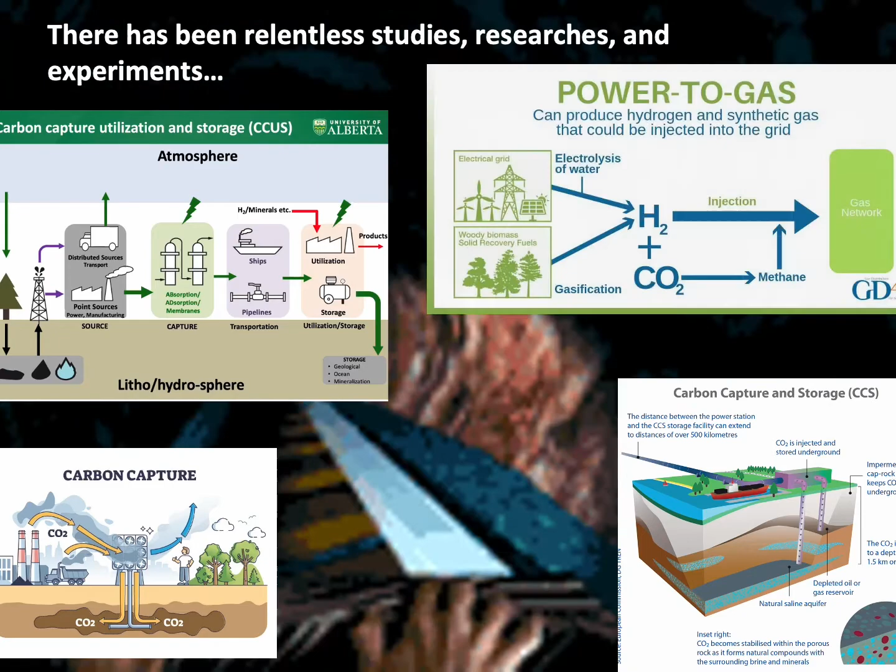There are indeed many great developments by the scientists around the world. And the power-to-gas, PTG, project is a very promising one. Just for you to get a quick understanding about the process, let me use this Audi animation film.

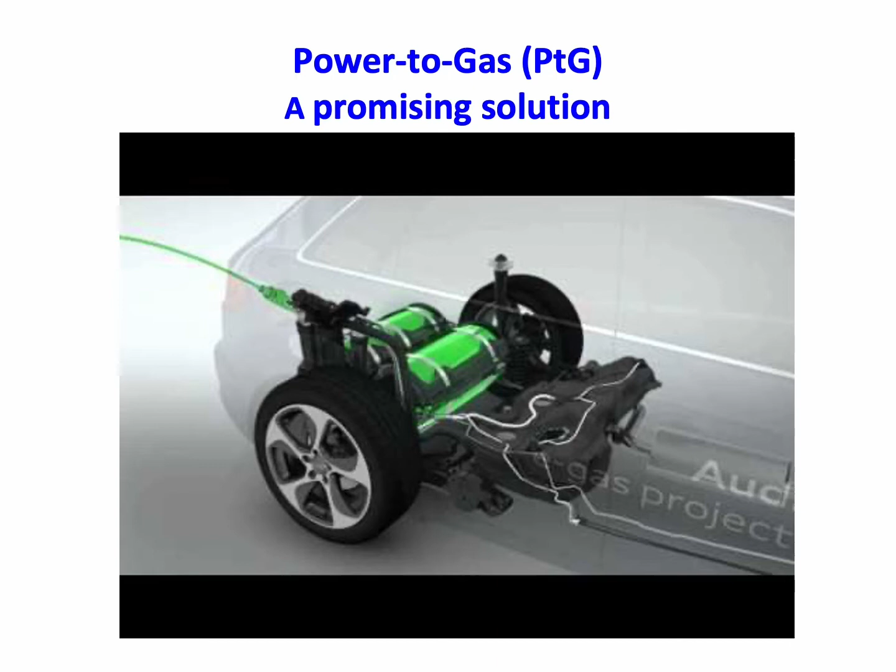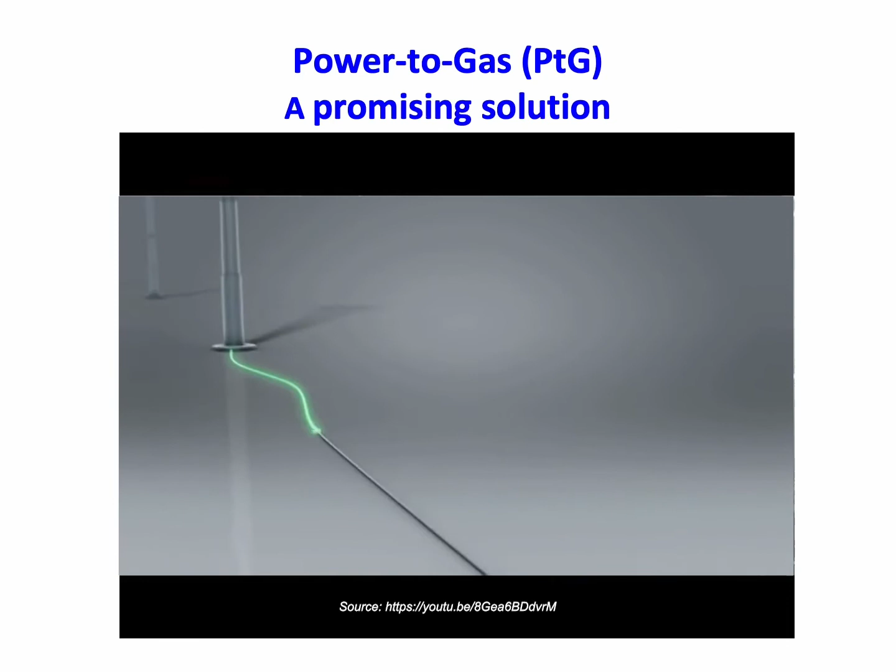The Audi e-gas facility bonds the CO2 into the fuel, making Audi e-gas a climate-neutral fuel. It runs on renewable electricity from sources such as wind and solar power. The first process step uses electrolysis to convert renewable electricity into hydrogen.

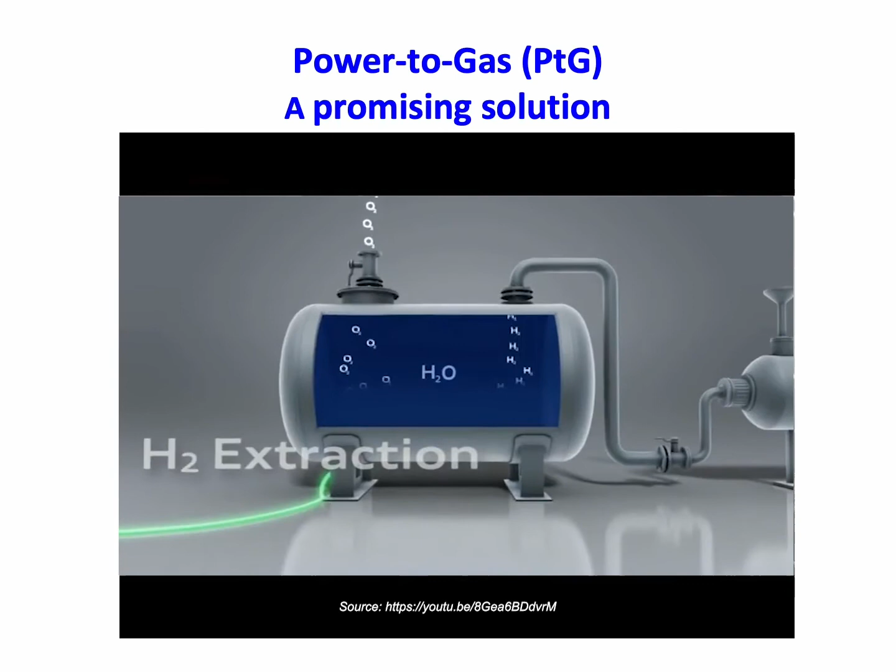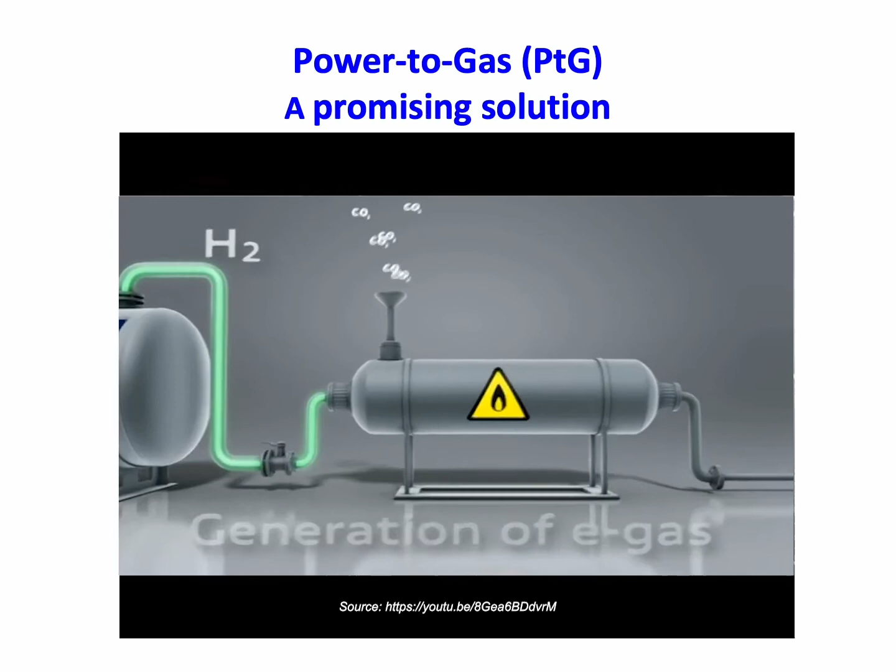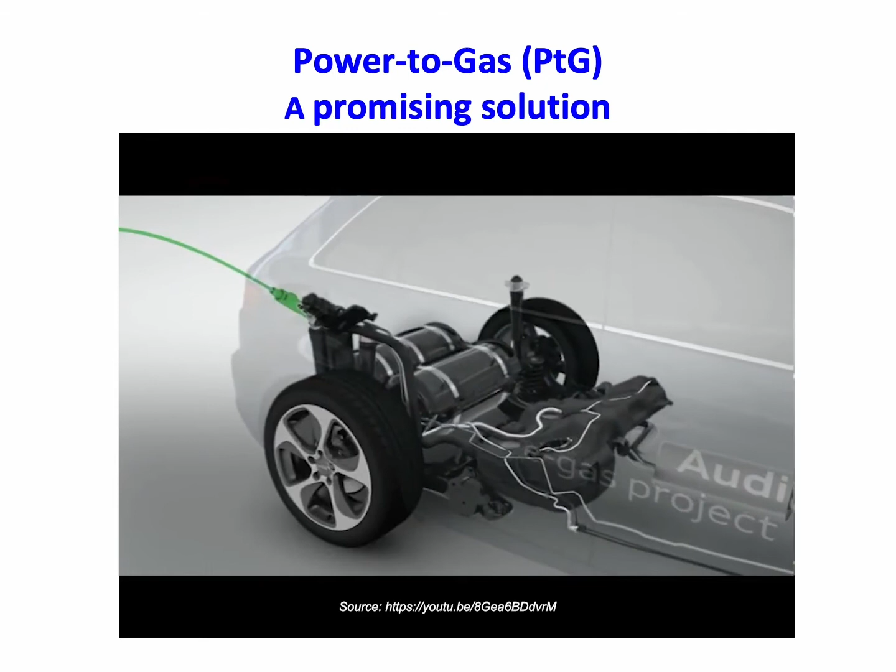When the hydrogen is combined with CO2 in the methanization facility downstream of the electrolysis, the result is synthetic, renewable natural gas, Audi e-gas. This can then be fed directly into the natural gas network and stored there. Audi e-gas is an energy-rich fuel that is chemically identical to fossil methane, the primary constituent of natural gas, and is ideally suited to powering internal combustion engines.

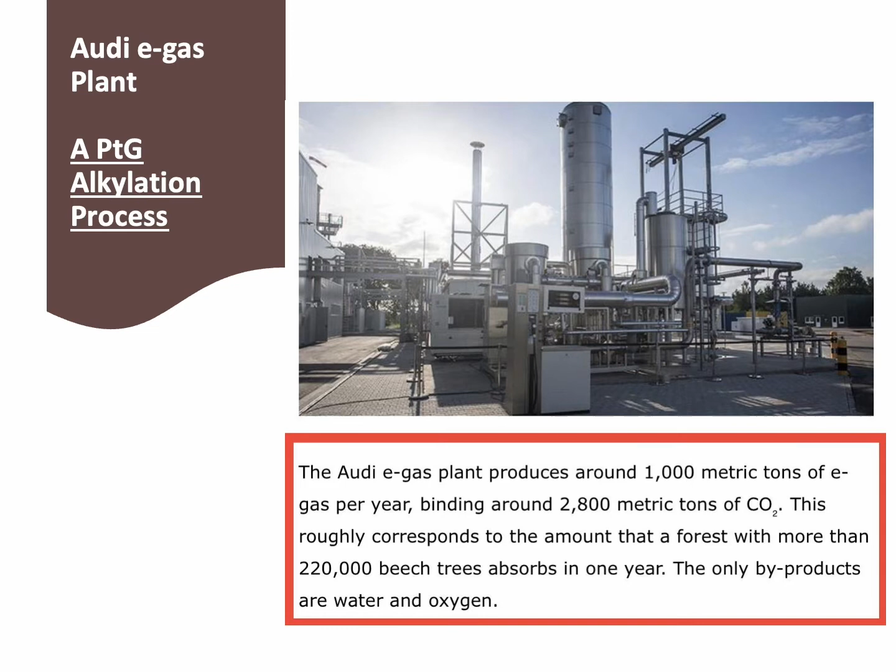There are, however, pros and cons for PTG. On one side, the output methane can be used directly in the car, or methane is mixed into the gas grid with hydrogen as a power source.

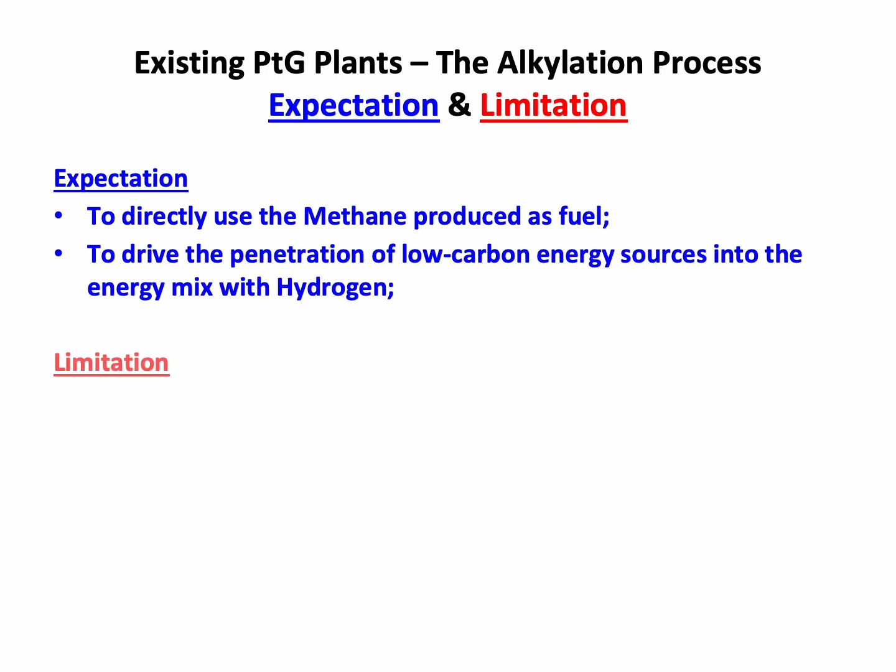On the other hand, the process needs very high temperature to work, and the carbon dioxide produced offsets its initiative. Secondly, the process has a byproduct, carbon monoxide, which is a poison to the catalysts and shortens its operational life. It is expensive to build up the plant and scale it up.

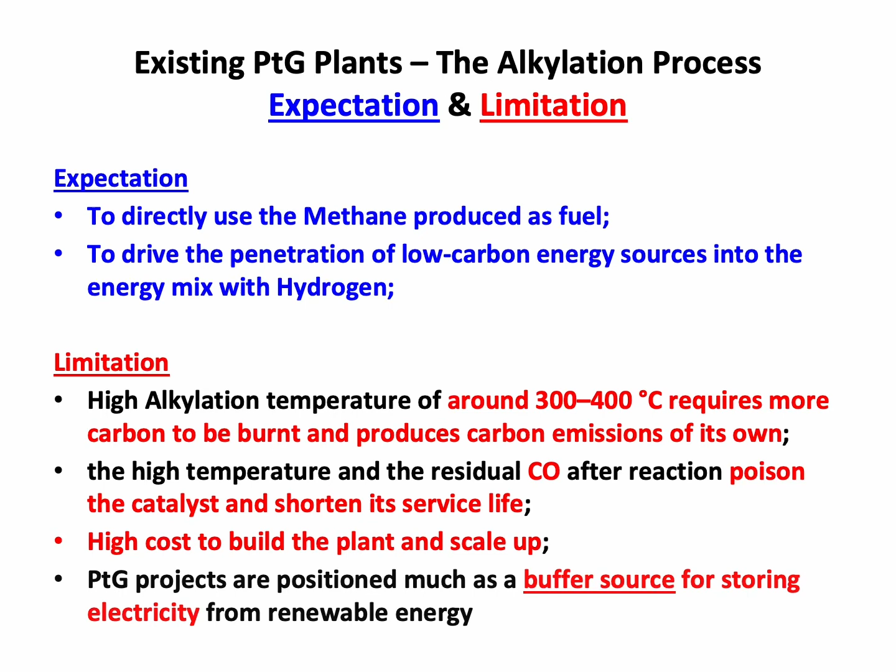With such, PTG can only be positioned as a buffer source for electricity. Now, coming to our process by NCKU, first and foremost, we use and see it as a resource, not a bad thing at all.

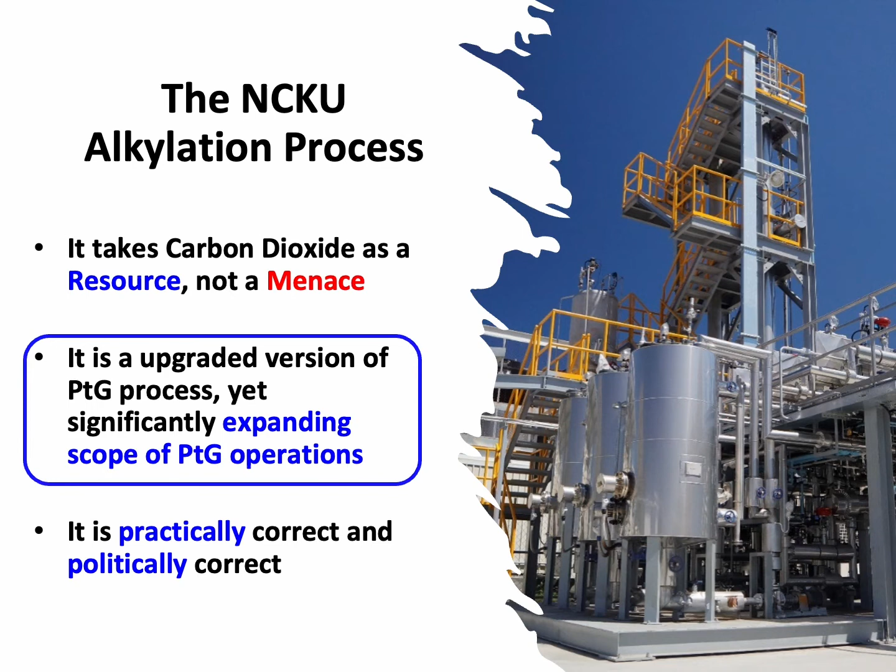It is considered a PTG project, but an upgraded version that can expand current PTG use to many applications. That makes the NCKU process both practical and politically correct.

It is unique in its carbon dioxide capture unit, where we have a special absorbent to catch over 90% of carbon dioxide and cut 30% of the cost as compared to other technology.

As to our core technology, other than methane, our process also produces high-valued ethane and propane. Its significance is the much lower operating temperature and pressure, the nearly 100% conversion, and the high content of high-value byproducts.

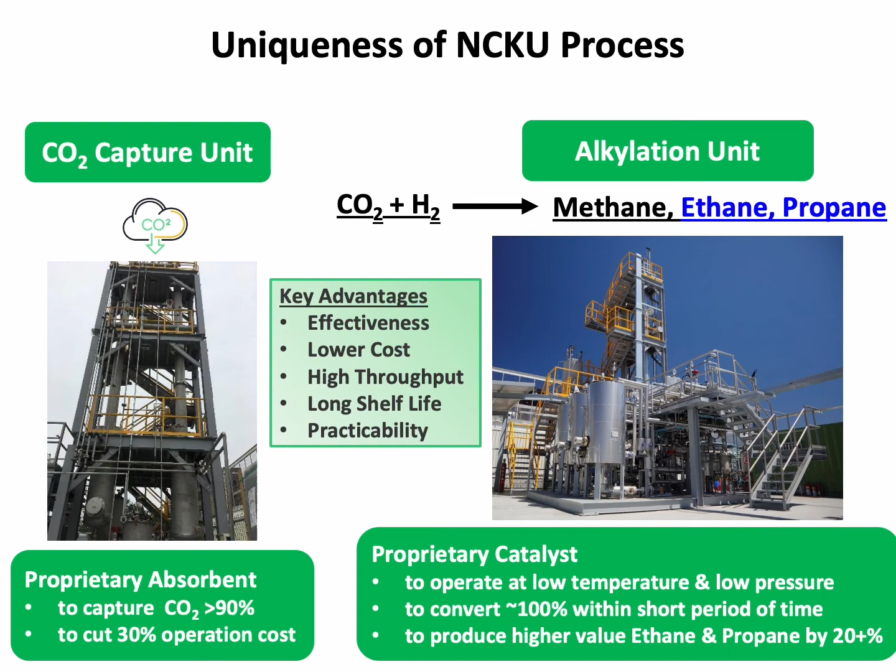To summarize, it is versatile, effective, low cost, high throughput, and practically correct. With such, the process can help to resolve the many challenges around the world.

Pollution from the petrochemical industry. The urgent need for us to reach carbon neutrality. Speed up the development of hydrogen energy. Last but not least, the ongoing challenge in EU for the shortage of natural gas and the price increase.

The advantages of the NCKU process can help in many ways, to name the critical ones: the enhancement of hydrogen energy development, the integration of the green feedstock with other processes to make new revenue for the petrochemical industry, and most of all, the availability of natural gas.

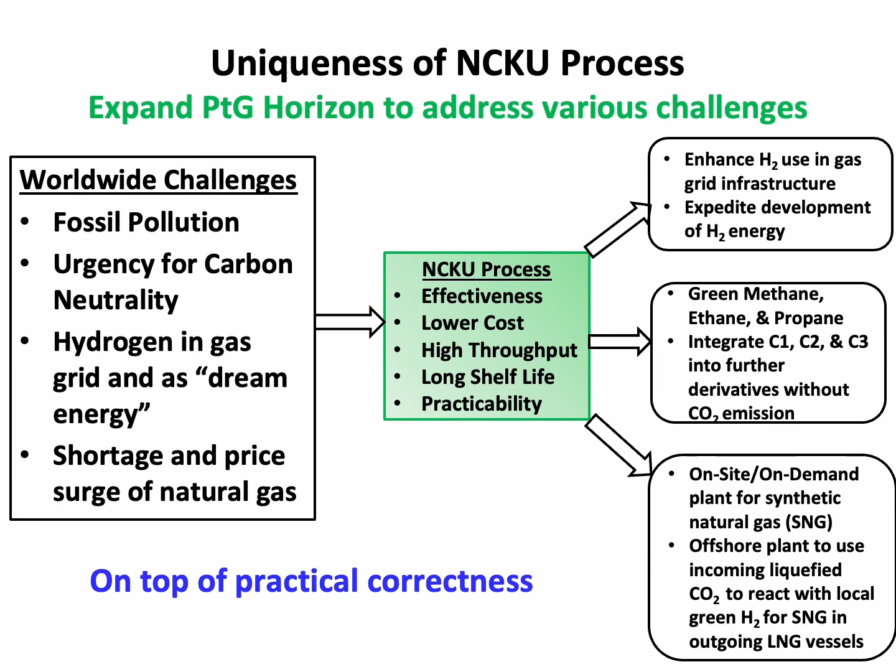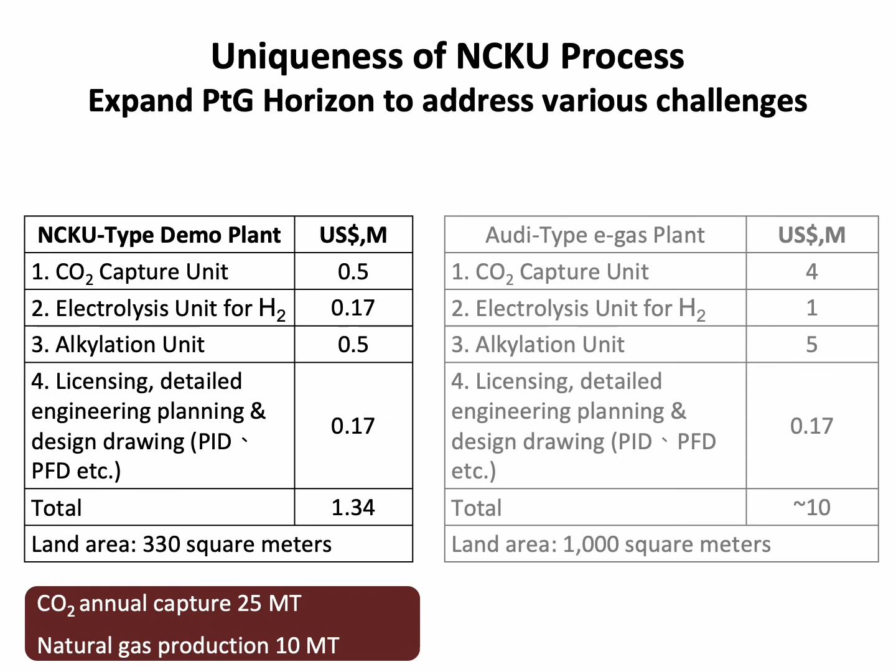To summarize this presentation, there is additional advantage of the process. Here is an estimate on the cost and the land required to build up a demo plant and scale it up. The message here is that you can be a good corporate citizen with privileged bragging rights.